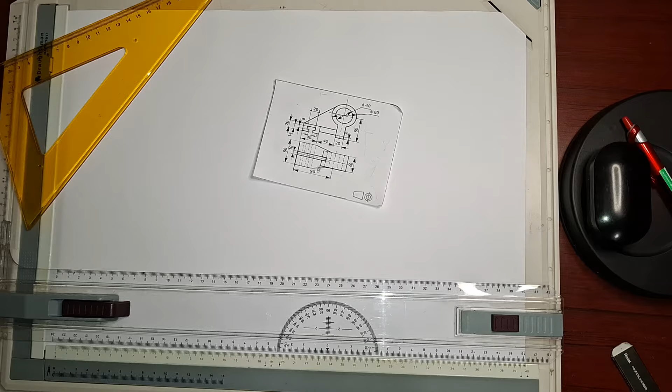Hello guys. So I want us to entertain this isometric problem that we have already tried to attempt in class. Right, so when you approach a problem like this, I know it sort of looks complicated, but it actually isn't, right?

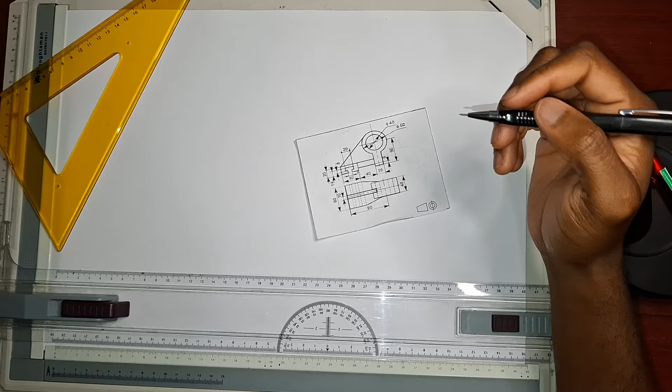So like I said, what you're going to do when you find a problem like this, you're going to divide it into features. And then in those features, you're going to start with the feature that is the easiest to deal with, right? So now this one, we can divide it into feature number one, which is also that one. Maybe let me use the color red. Feature number one, which is also that. So we can call it the base, right?

And then this one, we're going to call it feature number two. This one that carries that sort of cylinder, it's feature number two. And then this one, rib or a web, whatever you want to call it, it's feature number three, right? So from those three features, we're going to take it one by one. Don't try to draw everything at once. It might confuse you along the way. So we're going to start with feature number one. We'll draw it, complete it, then we draw feature number two, complete it, then we insert the third one. Okay, put it over there.

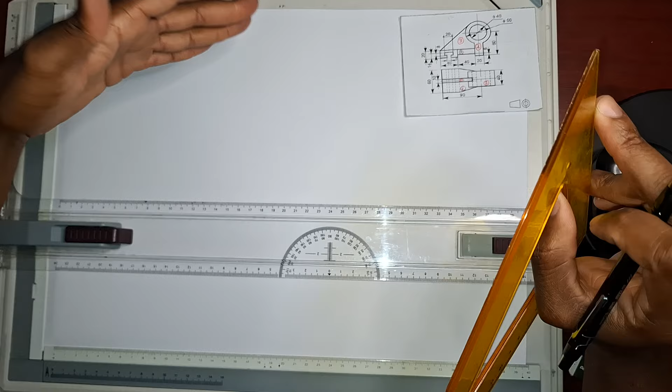So your starting point when you're starting your isometric, it's important that you do proper planning. Make sure that your drawing is going to fit in the available space. If you start your drawing maybe somewhere there, you'll find that it doesn't fit, or maybe it even goes over the border or over the page. So just make sure you start it at the bottom as far as possible, right? So put our three planes.

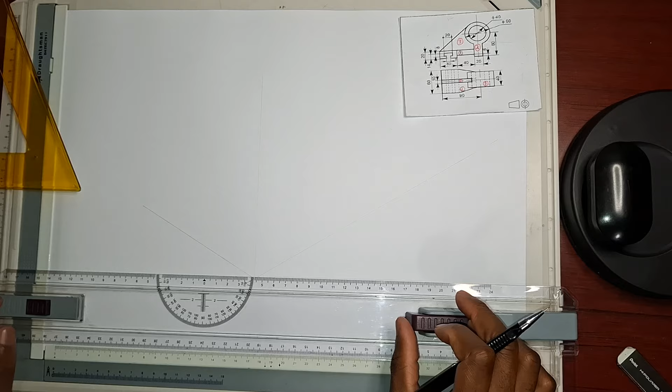Okay, I think this one I might need to do it like this. I think I'll need a smaller 30-60 set square, right? Or rather, I can put it like this. Yeah, this way it will work better. Okay, right. Then we are going to start with this base, right? So at the base, we'll start with that. Let's draw that first.

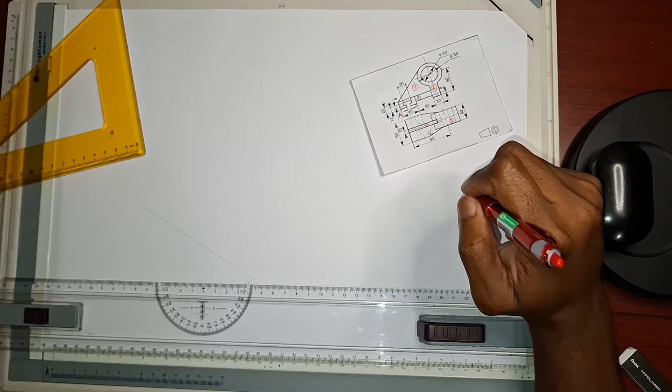So let's call this point right here point number A, right? Our point number A right here, we are going to make it the lowest point in this drawing. On this page, the lowest point of the drawing is going to be point number A. Okay, let me just shift this down. Then we're going to put point number A right there.

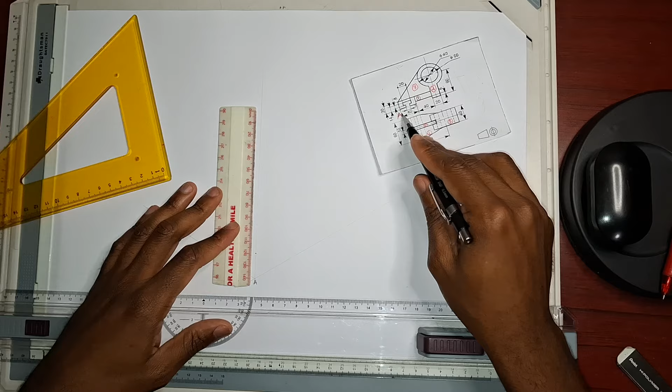Then we start. So now from point number A to there is 20 millimeters. We're going to measure 20 millimeters like this. And then from point number A to here is 40. Can measure 40 at the same time. 1, 2, 3, 4 there. And then, like I said, whenever you see a point in isometric, it's supposed to have 3 lines to it, right? You see point number A has 1, 2, and 3.

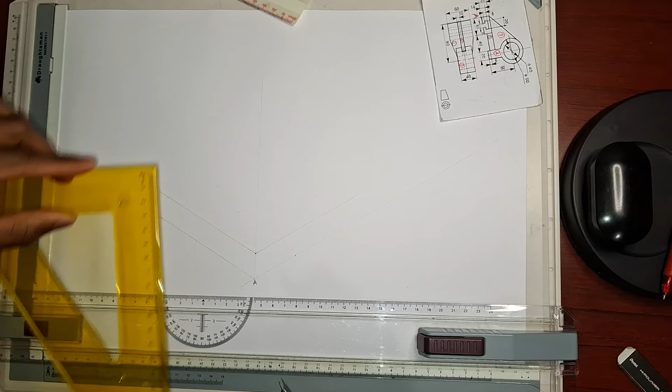So now if the other line is supposed to be a hidden detail, you leave it because we do not want hidden details. So for this point, it has line number 1. So you need line number 2 that way, and line number 3 this way. Just go and watch the introductory video if you are new to the channel. So this one has line number 1, line number 2. So line number 3 this way is going to be a hidden detail. From here going that direction is a hidden detail, so you leave it out for now. Make this a bit shorter.

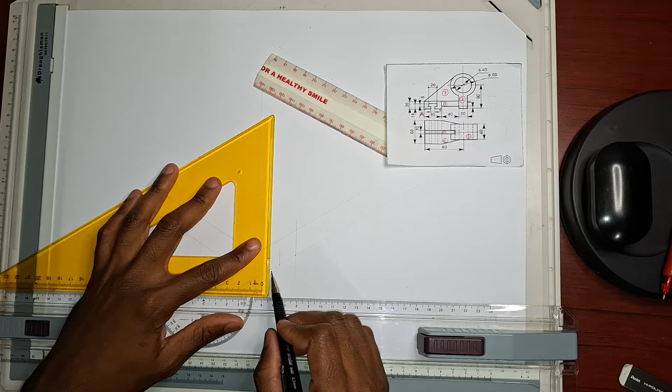Okay, so now right here it says 8 millimeters, and then it goes 20 millimeters. That would mean from here to there is 6, from here to there is 6. So you're going to measure, since it's 40, the midpoint will be 20, then it will be 4 this way and 4 the other way. I don't know if these lines are visible, but now I'm just drawing constructions. I'll make them darker.

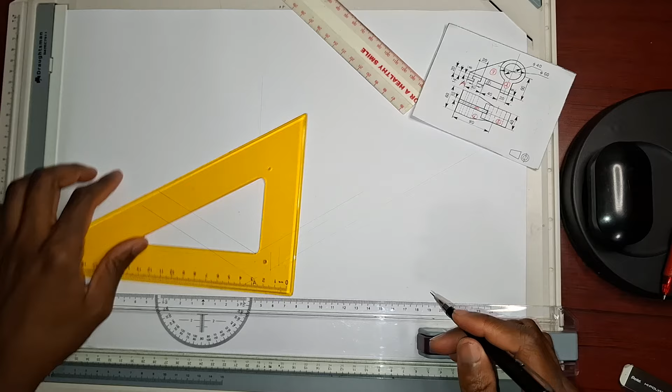And then there is 8. So if it's 8 there, then from the bottom is 14. Measure 14 right there. Will be there. I'll make it darker, don't worry. And then 20. Remember we said this is 40, so 20 will be right there. We can make this darker. Oh, sorry, I put it at the wrong place, but that one is supposed to be dark anyway.

So the 20 I was looking for is supposed to be here. It's there and there. So it goes down 8 millimeters. I'm going to erase what's not necessary there.

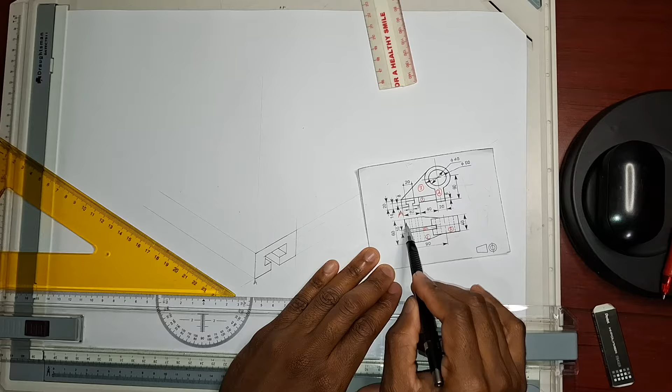That. Okay, right there. Now we've produced this part. So just to finish it off, let me take this out. To finish it off, this is supposed to go that way. Just like that, right? And then this way, from this corner going that direction, this corner going that direction, is what? 60 millimeters. So you're going to measure 60 millimeters.

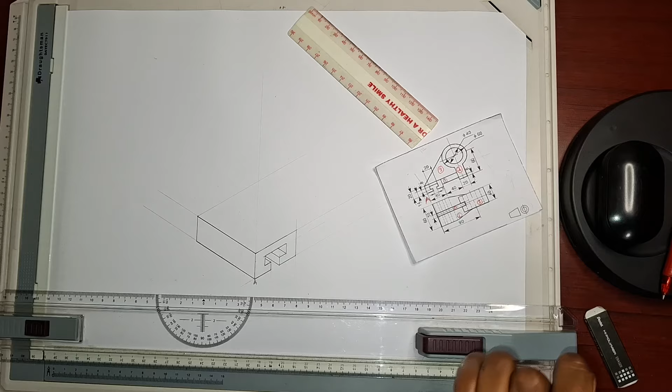Okay. Right. And then now we have to finish it off. It goes from here, then to there, then to there, then to there. So now remember, I said the lines that are going to be 90 degrees, like vertical, and the ones that are going to be horizontal, 0 degrees or 120, 180, they are the ones that are going to be isometric lines, right? So you see lines like this, like that, like this one, like that one. They're the ones that are going to be isometric lines.

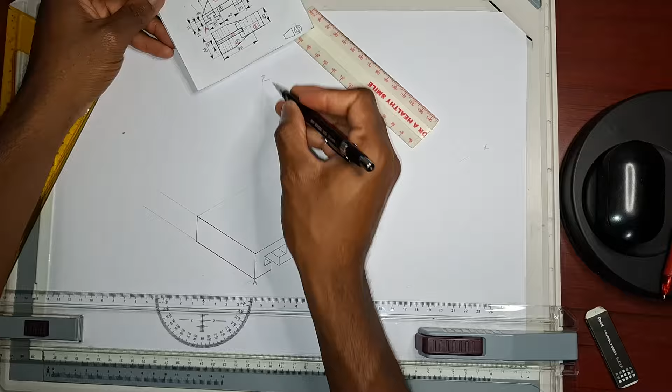Basically, any line in your isometric that is going to be parallel to this axis, that axis, and this axis, they are isometric lines. So you see this line here, it's not parallel to that one, it's not parallel to this one. So it's going to be a non-isometric line, right? So you're not going to draw it using this one, right? So how do we draw it?

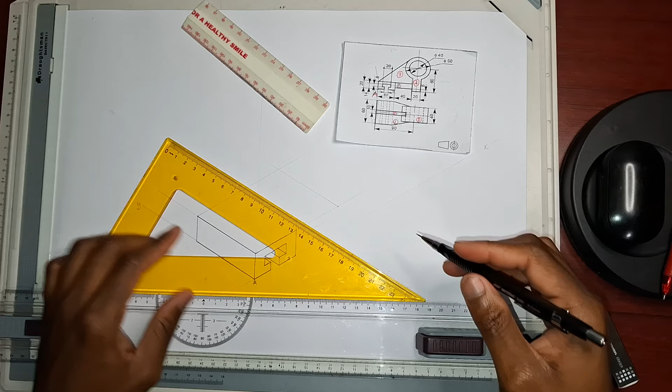See, from here to here, where feature number 1 ends, it ends here, right? It's 80 millimeters. So we're going to measure 80 millimeters. Count 8. 1, 2, 3, 4, 5, 6, 7, 8. Ends there. That way and that way. Now these are the boundaries of feature number 1.

So like I said, we're going to draw feature number 1 and complete it, regardless of what's going to be hidden or not, because some of the things are going to be hidden here, right? Okay. So when you check here, it goes from here to there, and then it turns. From here to there, then it turns. Now, what is the measurement of this from here to there? It's given as 40, right?

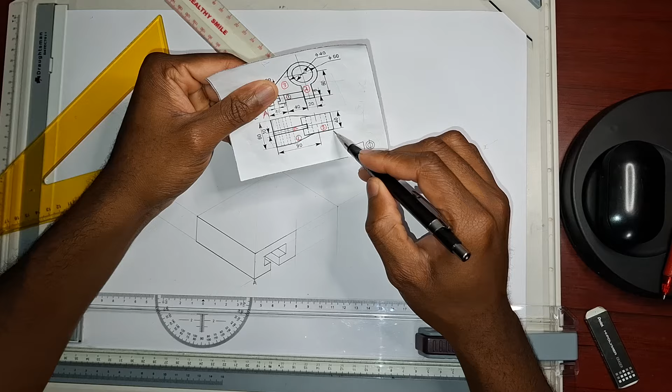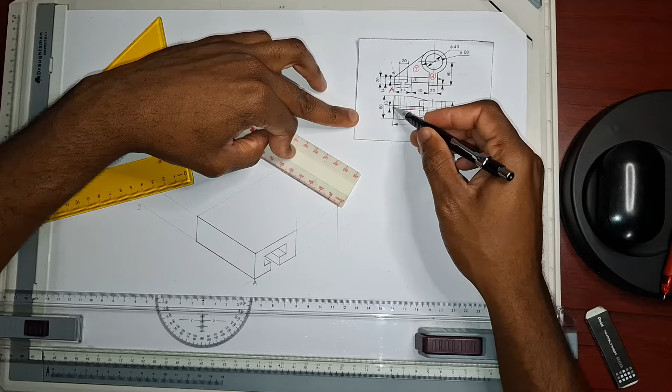And now this thing is in the middle. Can you see that from here to there is 20, from here to there is 20, from here to there is 30, from here to there is 30. So it's actually in the middle, right? So you have to find the middle section of this part here, which is going to be 30. That is the middle part you're looking for, the center of that drawing. So it's 30. You can just put a line right there to show that that's where your center is, right?

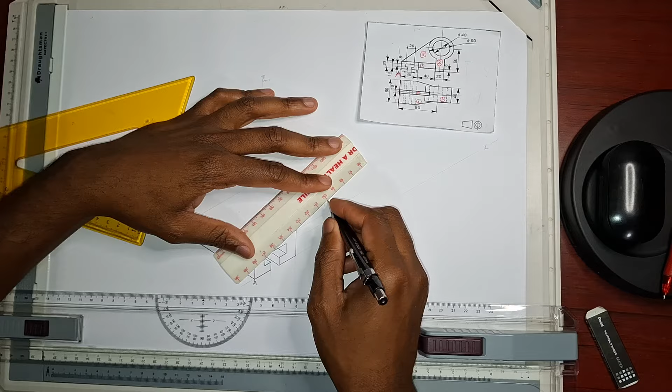So we said this is 40, meaning from here to there, 20, from here to there, 20. We're going to do the very same thing as well. You're going to measure 20 from the center. Okay. Going there. 20 from the center. Going there. And then now you can draw. Join there. The other side I did not mark. And joins there. Like this. I'm not going to make them dark this side, because some of them are not going to be visible, some are going to be visible. So I don't know which one is which for now.

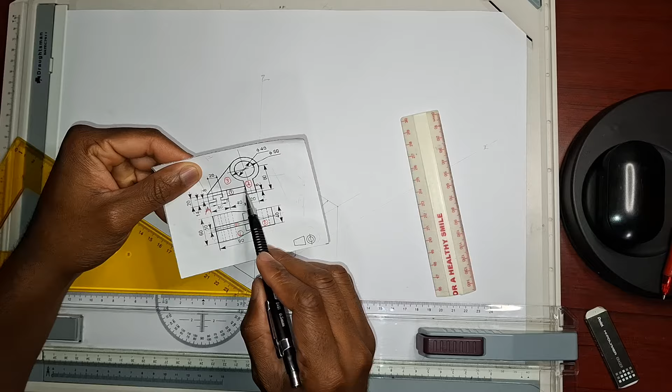And then this line that I just drew is that line right there. It's this one. But that line, it goes down like this. And how long is it going to be? They said from right here to there is 20, right? And then they told you again from here to there is 6, right? This part here and that part are in the same line. Don't forget that. So from here to there it's 6, meaning from here to there it's 14, right? So you're going to take this thing 14 millimeters down.

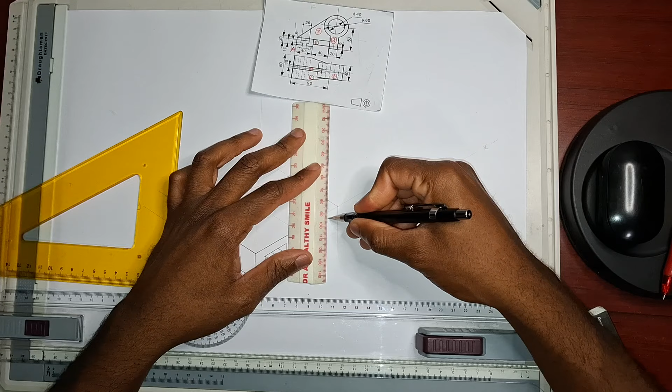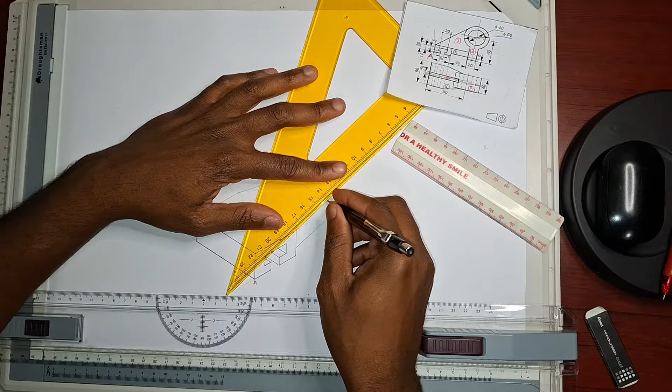So you're going to measure 14 millimeters right there. And then this side, 14 millimeters there, and you close it. Like that. Can even make that dark if we have to. Okay. Right. Now we are done with feature number 1, right? See, it's not that difficult when you take it feature by feature. Don't try to do everything at once because you're going to struggle, right?

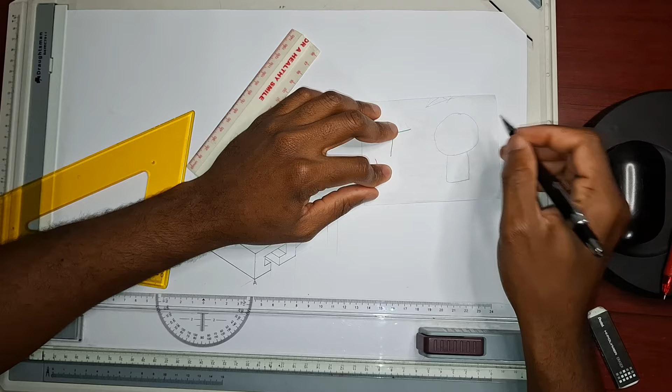Okay, so now let's insert feature number 2, right? Feature number 2, I would like for us to divide it into 2 sections as well. I'm just going to draw feature number 2 this side. So feature number 2 is basically something like this, right? Let me just show you. If you complete that circle, it's basically something like that, right? So now it has a center there. Now I want us to divide it into 2A, 2B, right? From here to there is 60 millimeters, but from center to the radius is 30, right?

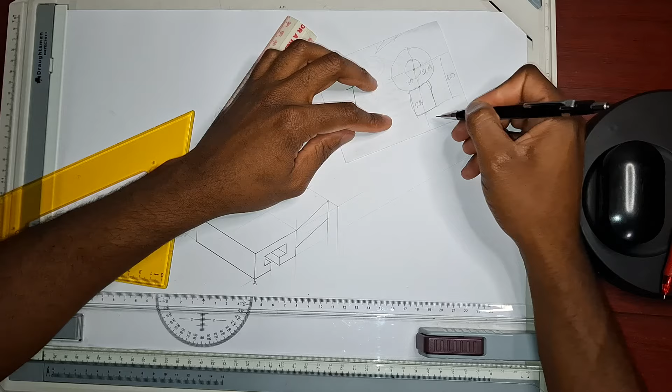So it means the dimensions of 2B are going to be 20, as they said, by 30 for now. We'll see how that goes. We're going to put feature 2B, and it's a 20 by 30. We're going to cut it here and put only feature number 2B. Let's take it section by section. So we start feature number 2B right here, and we go 6 millimeters down, as they said, 20 millimeters that way, 30 millimeters up, 20 millimeters back and down, like that.

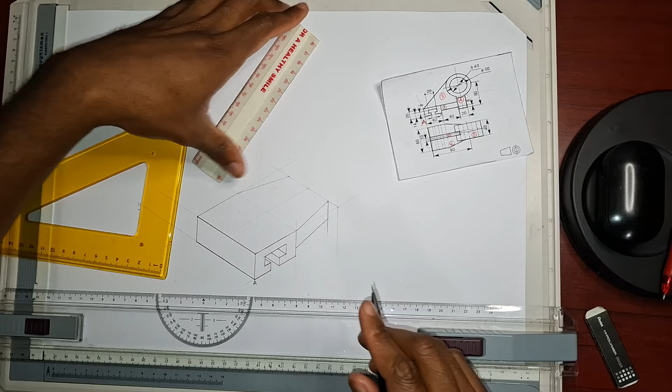Let's do it. From here, 6 millimeters down, right? Let me take this one out. We took it 6 millimeters down, and we're going to take it 20 millimeters to that side.

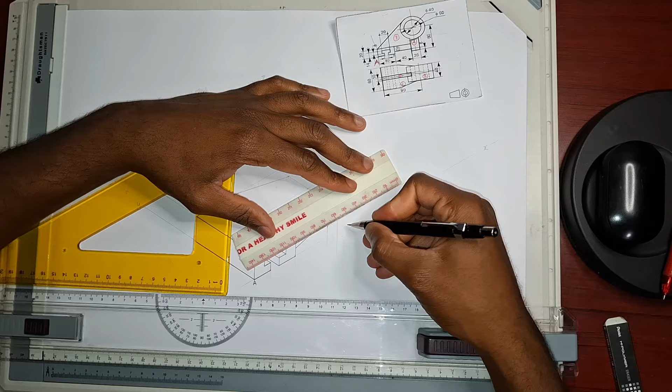Then we take it 30 millimeters up, 1, 2, 3. Then 20 millimeters back. Then we close it. Don't make it too dark because we're going to have to erase some of the things there. Let me take this out to avoid confusion, so that we see what we already have for now. Right there.

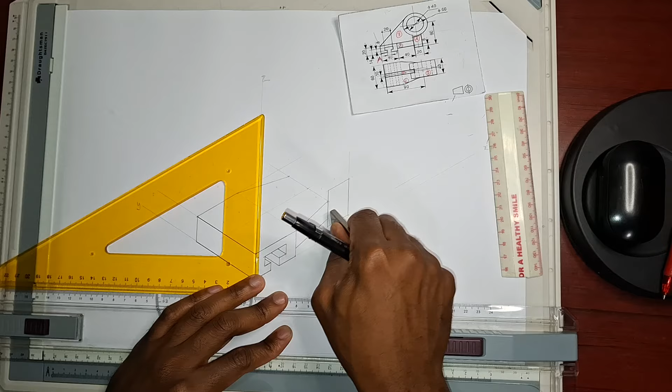So, like I said, each and every point is supposed to have 3 lines coming to it. You see, here we have 1, we have 2, we need the 3rd one. Just a small little piece right there. It's like that. Right? And now we can insert feature number 2A. This was feature number 2B, right? And how do we insert feature number 2A? I'm going to tell you right now.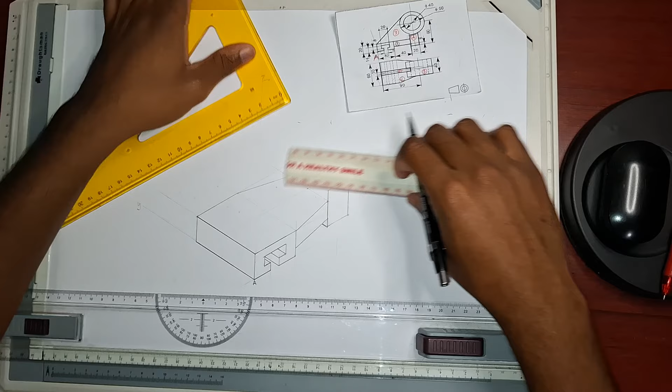And that is the middle part. I just want to draw a center line. It's like that. I'll just leave it like that for now. And then since this is a circle, we're going to put that circle into a box, right? Inside a box. And that box's dimension is going to be 60 by 60 because the diameter of that circle is 60, right?

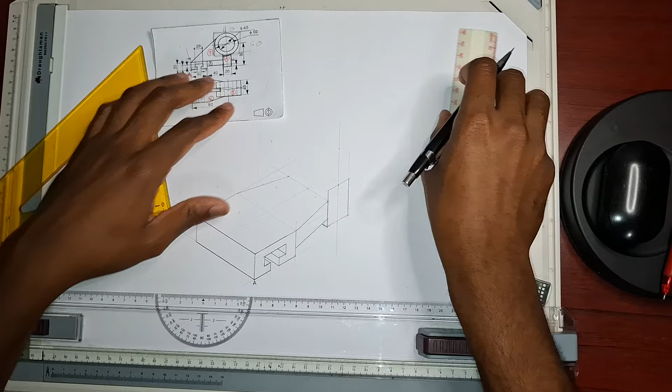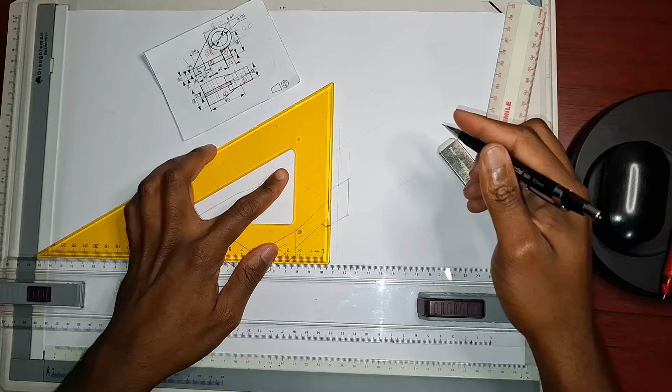So we measure 60 from the bottom, as they said, right? 60 from the bottom to the center. 1, 2, 3, 4, 5, 6 is there. And that is the center. Yeah, I'm gonna take this a bit up. Okay, let me extend this just a little. I'm just gonna use a compass to measure. The ruler takes time.

So we said the box is supposed to be 60 by 60, eh? So I open the 30 here. 30. 30, it lands right there. 30. 30 on the other side. Let me construct my box. There. There. Sorry. Okay. Right there. Now we have our box.

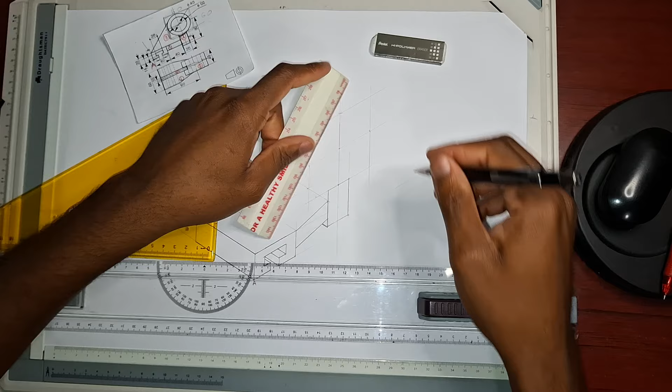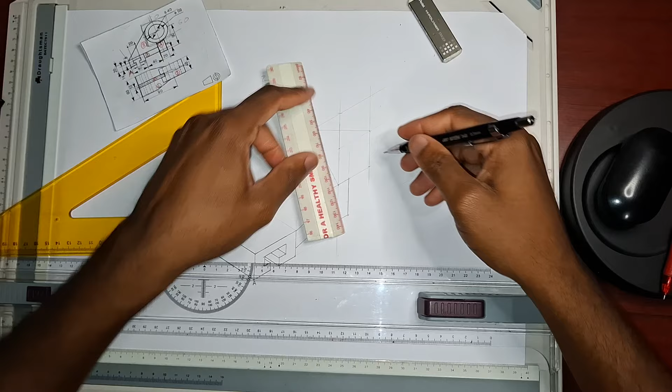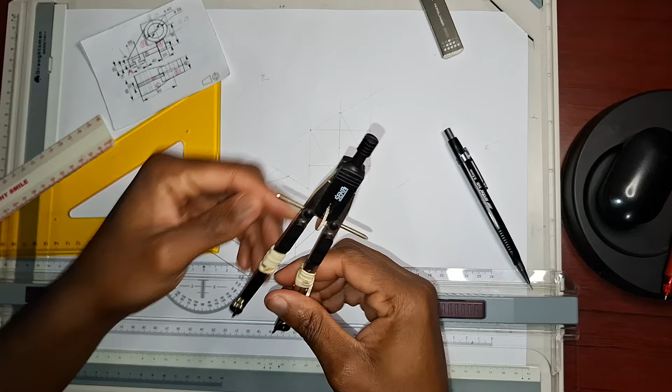Now, how do we put an isocircle? We said we are looking for the longest diagonal, right? Oh, why am I saying the longest? The shortest diagonal, right? So the shortest diagonal is this one, right? Then we say 1, corner to center, right? Like that. And then that. In that way, right? Then we come with our compass. You place it here, the corner, the intersection, the corner, the intersection. Start with this one.

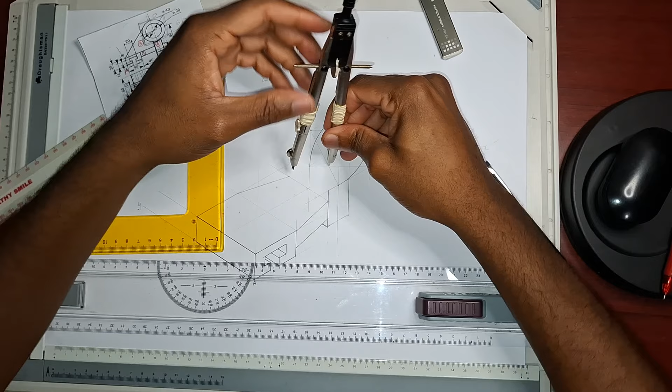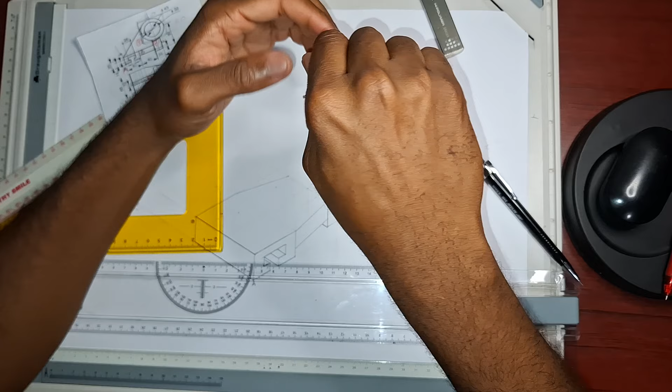Good. Close it. Gonna put it here. Okay. Just leave it right there. Right there.

Right. So now, this is why I was saying we shouldn't make this dark, because this tiny little piece right here is supposed to actually go touch there. Yeah, it's actually supposed to go and touch there. And touch there. So that we'll be able to get rid of that. Just like that.

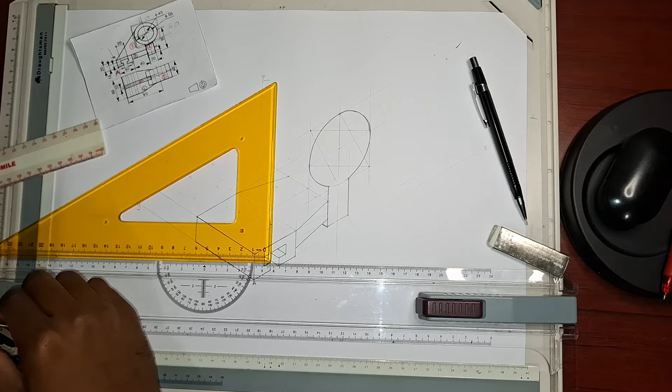Right? And then there is another one inside. It's the 40. And then we're going to put the 40. I didn't really want to put that one, but I'll just put it there for the sake of those who would want to see it there. Follow the same procedure. Draw another box. As you can see, you are going to be having so many lines in one space. So you need to be very careful about your faint lines and your dark lines.

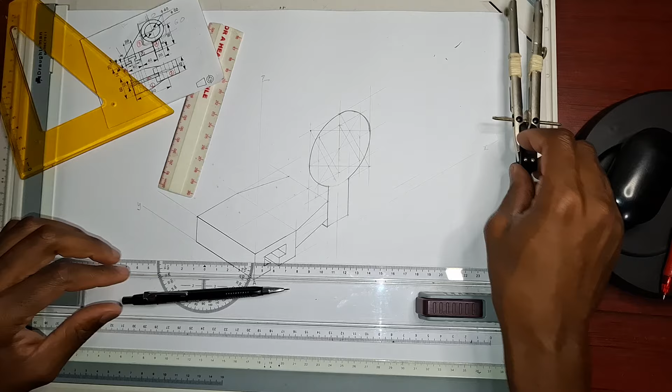Right? And then shortest diagonal, corner to center. Shortest diagonal. Shortest diagonal. See, I took a shortcut there. Don't worry about it. You just follow the procedure. There. Start with this one. Did I make it correct? Okay, yes, it is correct.

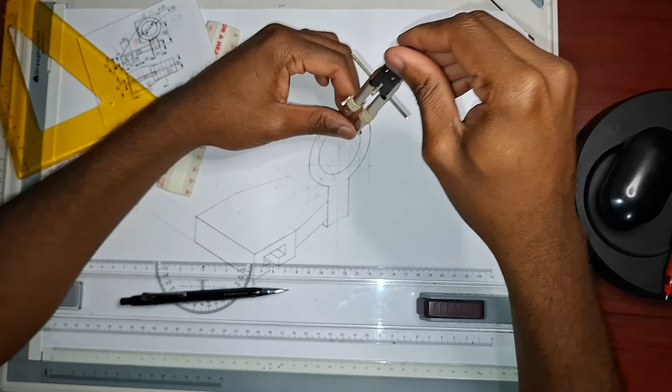Oops, sorry. Put in the wrong place. Yeah, I did put it in the wrong place. It's supposed to be here. Just like that. I hope we're still together.

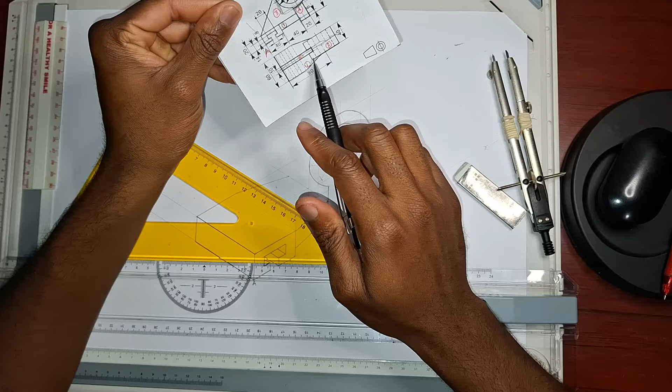And then all of these are supposed to be projected to the other side. So this part here is this part, right? So there's also another one on the other side. So you can either draw this same box on the other side, or you can just do a measurement transfer, right? So let me just try to draw the measurements, then we can continue. Okay, so let's do the measurements transfer.

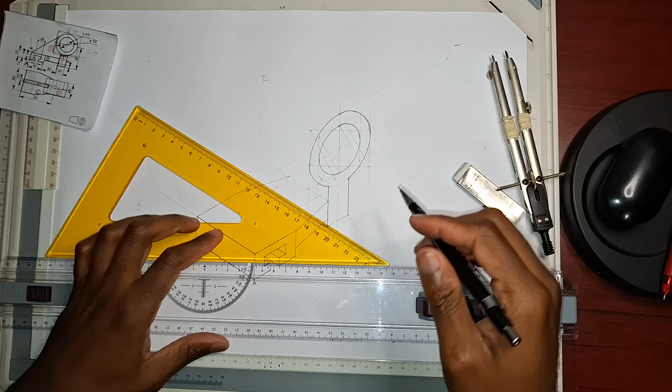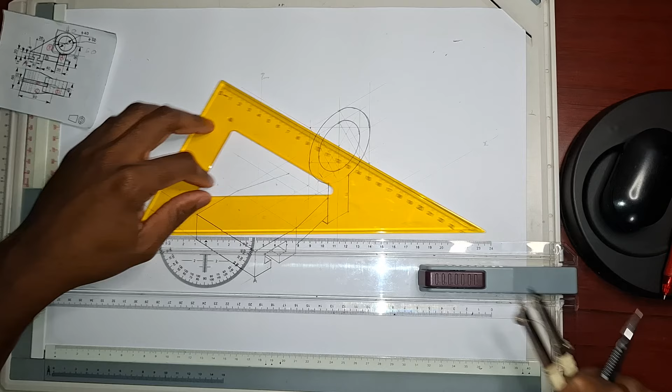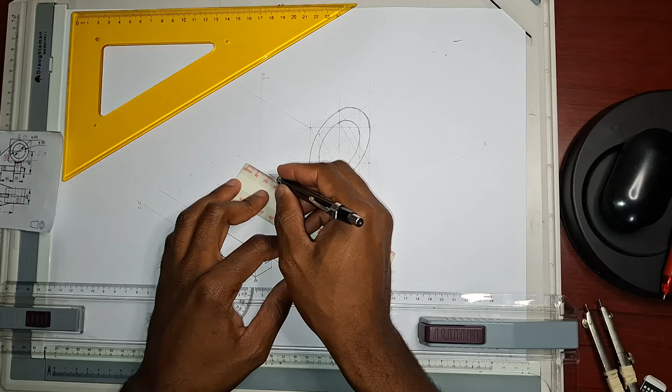I'm just gonna try to draw this box on the other side in case there are others who do not understand what we mean by measurements transfer. We're gonna transfer this to the other side. So from here to there, from here to there, it's 40. So we find that corner. Where is it? It's 40 there. Sorry. Is there. Did I measure correctly? Yes, it's 40 there. Take it closer. Drawing board moved.

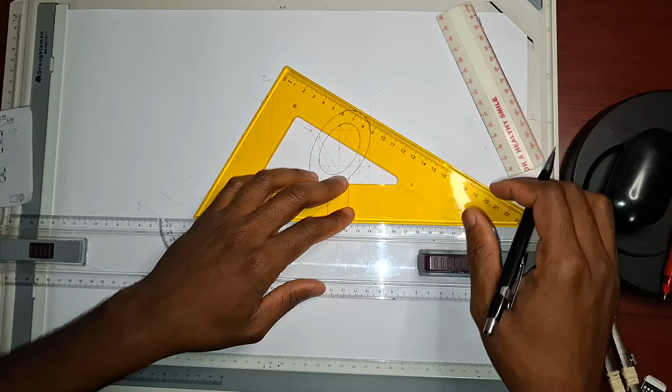Have a problem now here. Gotta take this to the other side. Then we can move it. It's like that. Now also take this center line. We're gonna need it, and also the other one. Here's the other one. There.

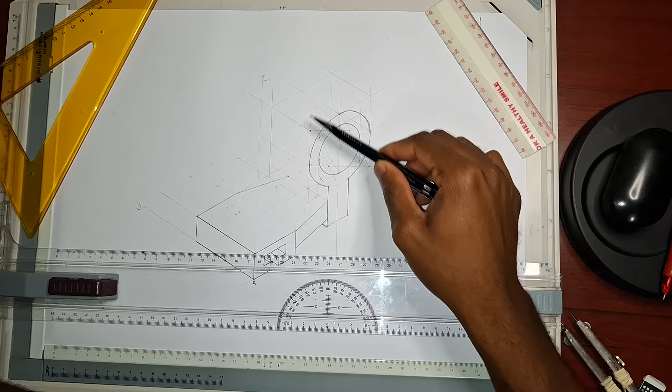So we draw the box at the back. This one we don't need to draw it. Yeah, it's fine. I think we have enough information. So we are supposed to transfer this to the other side, right? This to the other side. So we're also gonna need that corner right there.

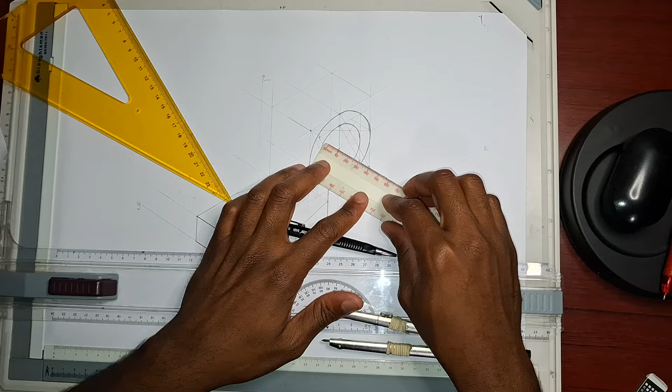Okay. So now what you're going to do is you're going to measure 40 millimeters from this corner along that line. Ne? 40 millimeters from this corner to there. That is where you're going to put your compass, right there. Or the intersection of this line and that one. That intersection, that's where you're going to put your compass.

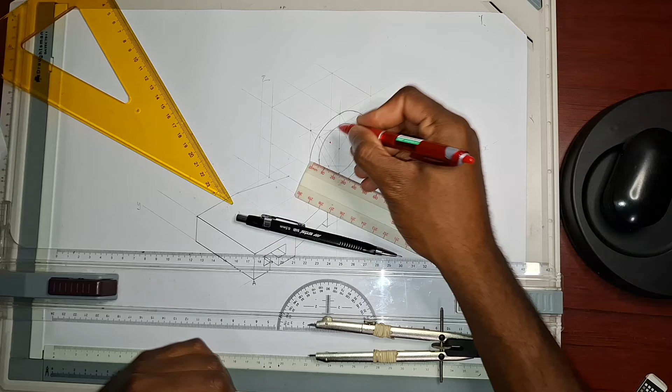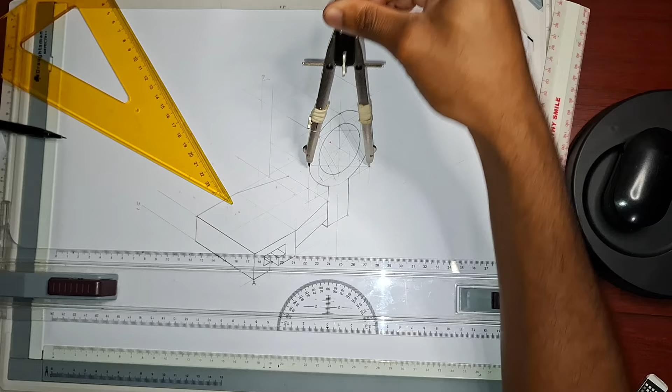So check this. When you open your compass from this side, right? You opened it to the center, didn't you? You opened it to the center and to the center of that other one, you see? To the center and to the center. Now, keeping the same measurement, you're going to do the very same thing. You're going to put it on the red dot here, right here, and you're going to take it to the center and the center of that other one, like that. Shouldn't be that difficult.

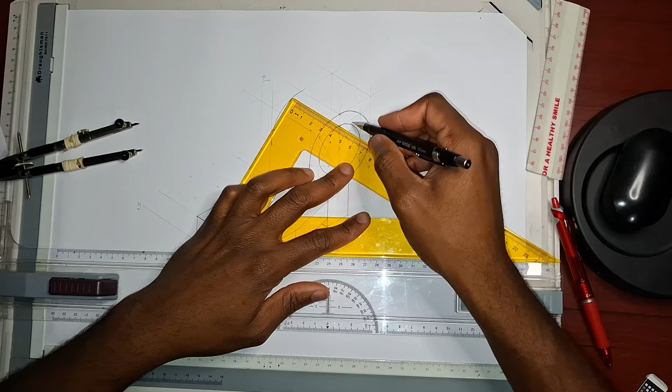Just like that. I hope I didn't lose anyone, right? And then close it. Now for this one as well, on the other side. Now for that one, it was which one? Let me see. It was this one, right? This one. So we're going to also transfer this one 40 millimeters that direction. 40 millimeters that direction.

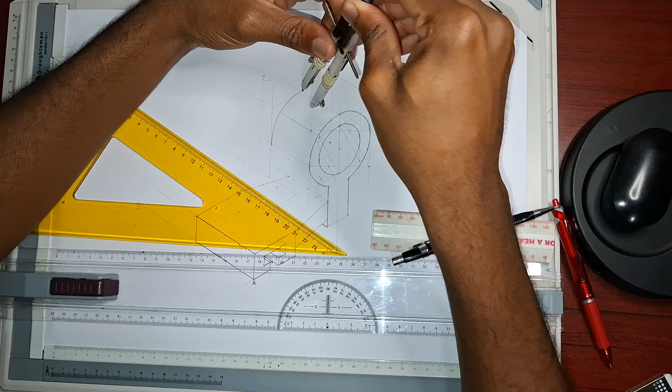So if you don't want to do measurement transfer, you can just draw this box there at the back. Still the same thing. So this side, you opened it to the center, you see, then you draw. You're going to do the very same thing here at the back. Put it there, open it to the center, and you draw. But this one, you don't need to draw all of it, right? Because you're going to cut it somewhere.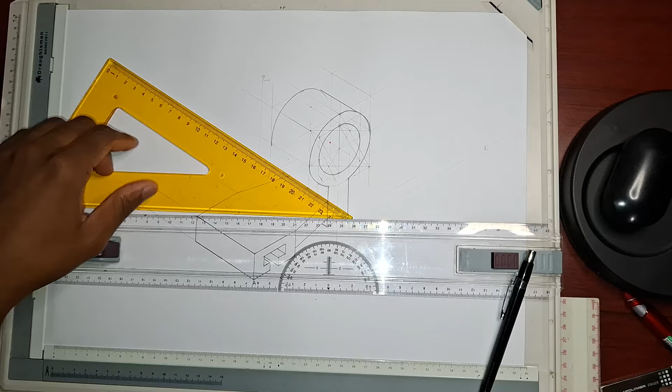And how do you cut it? You draw a line tangent. So a line tangent is going to be right there until it touches that other one. It's supposed to touch it. It means my measurements were not sufficient enough. Yeah, they were not sufficient enough. I didn't get there. Then take this out.

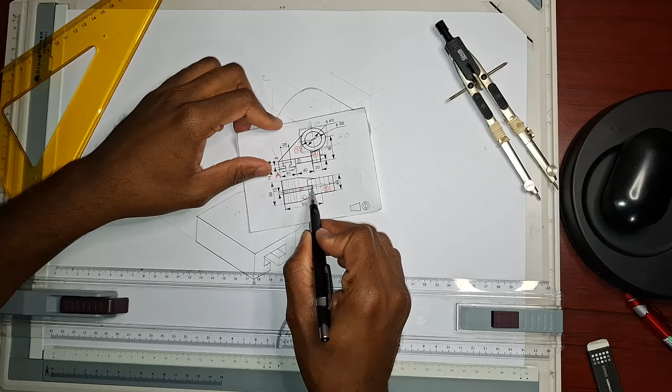For now, let's leave it like this, because here we're going to put the rib there. There is our rib. So our rib is going to go to the center right there. Let me show you. Our rib is going to go to the center right there. Sort of like tangent as well. Kind of, not really, but kind of like tangent as well.

Right, so now, how do you put it right there? The rib. So we have to put the rib right there. Okay. So now this rib is supposed to be tangent to this circle, right? Cylinder, so to say. So when you check, the rib is 10 millimeters, okay, the center.

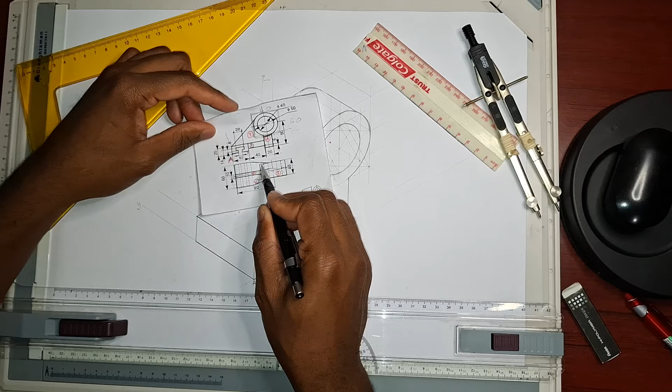That would mean from here, this one, to right there. If this is 10, it means, okay, we'll subtract 5 right there. From here to there is going to be 15, right? And from here to there, 10. From here to there, 15. So what you're going to do, since it's said to be tangent to this one, you're going to measure 15 from here. Not from there, from here. You're going to measure 15. Sorry.

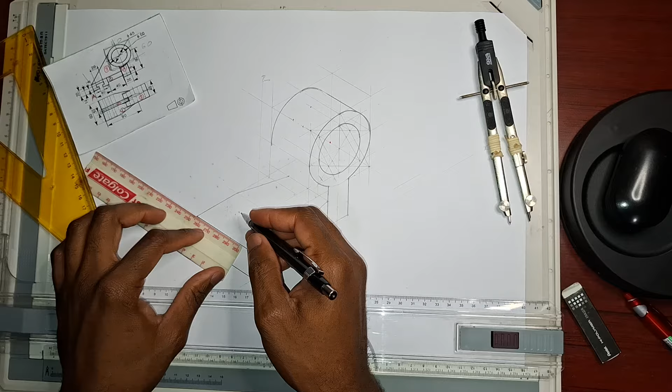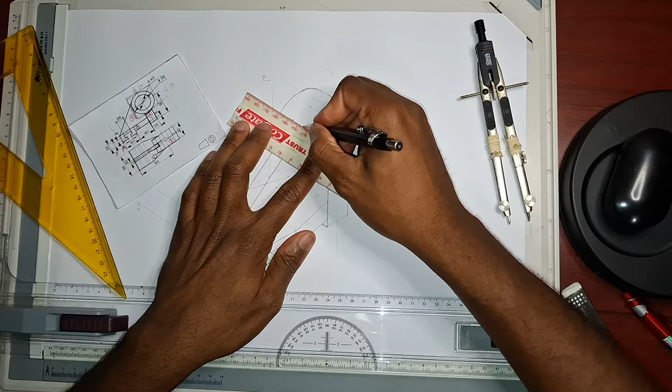That's 15, right? And then what you measured is from here to there, right? But this is said to be 10. So you're going to put 10. 10. And here as well, it's gonna be 5, 10, and 10. You simply take your ruler, there, there, and there's a line there, like that, right? And then here there's supposed to be a curve that follows this, a curve right there.

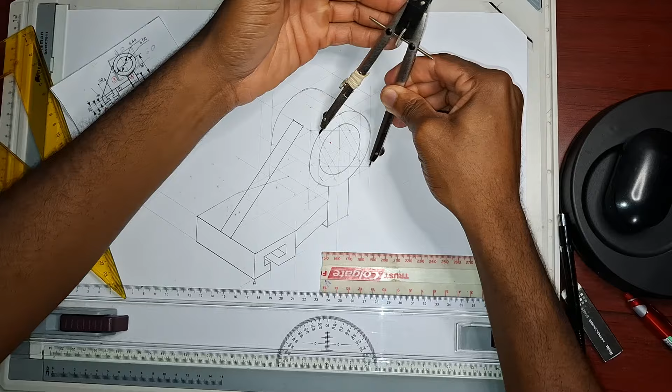So you're going to transfer the measurements for this one, that direction, 15 millimeters. Since from here to there is 15, you're going to take this 15 millimeters. 15 millimeters should be there. So this is what we are looking for. Take this, put it here. See, it's supposed to land right there. Mine is just a few millimeters away, but yeah, it's exactly what's supposed to happen. Just like that.

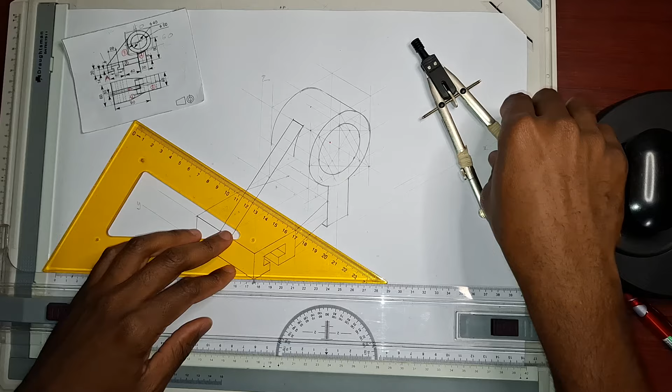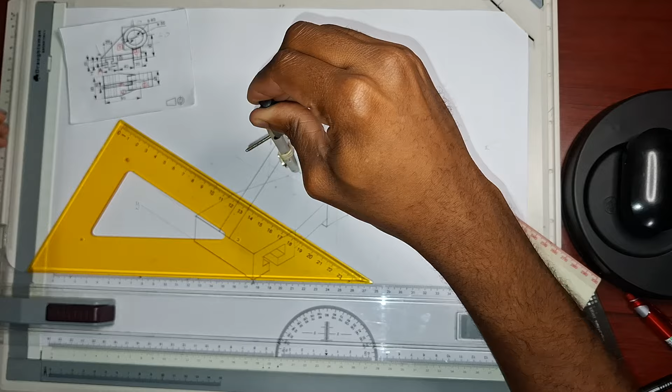And it is also supposed to be tangent to this one, apparently, to this one right there. So going to do the same thing, transfer the measurements along this line. I didn't do it 15 millimeters. 10, 15 should be there. If it sounds too complicated, just rewind the video. That.

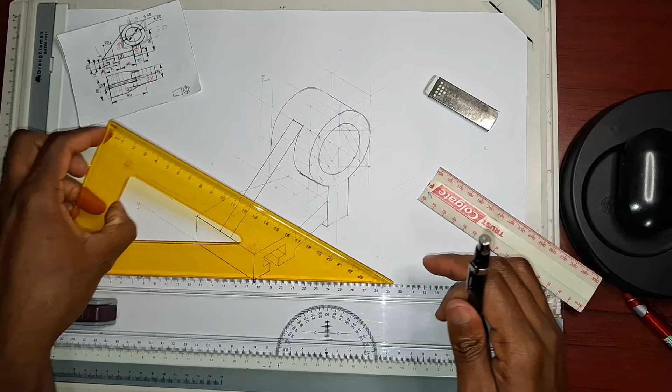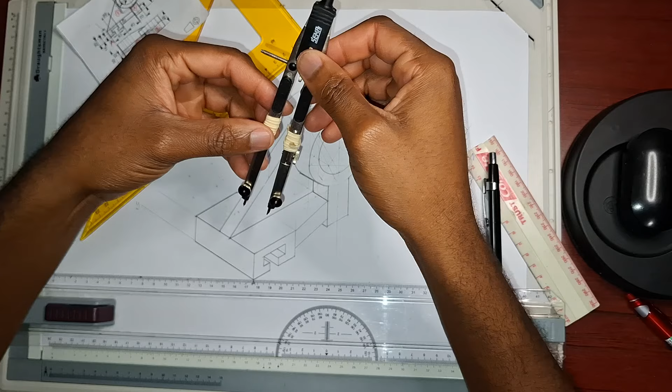Now we complete the drawing. Just erasing what's not necessary. So now it is showing us that this was actually supposed to get here. Nothing too complicated. Perhaps I can just remove some of the things that just... now, this is basically what you've been trying to do.

If I left something, then that's your responsibility to go and get it.